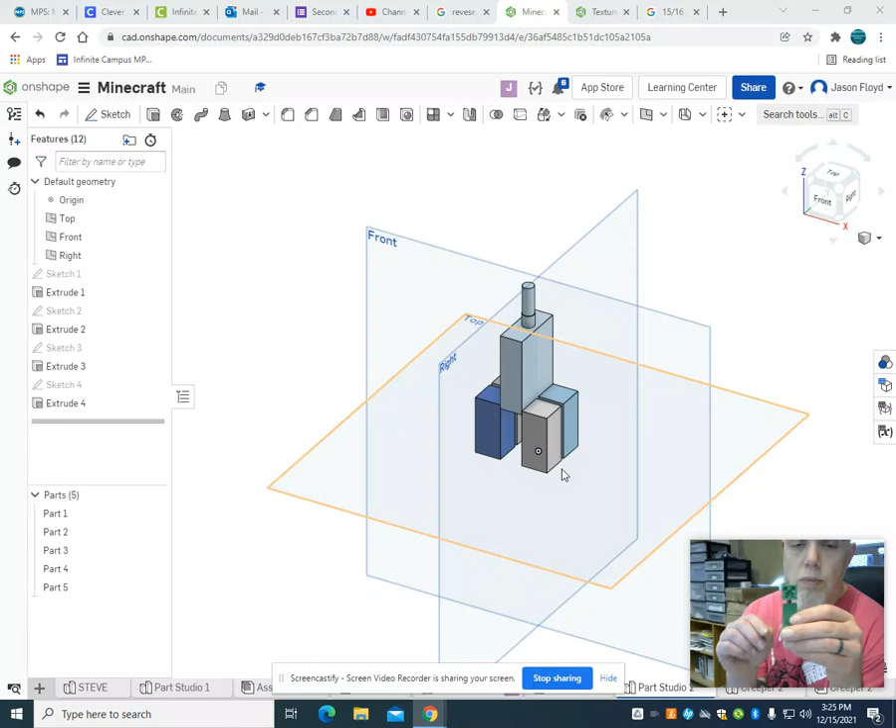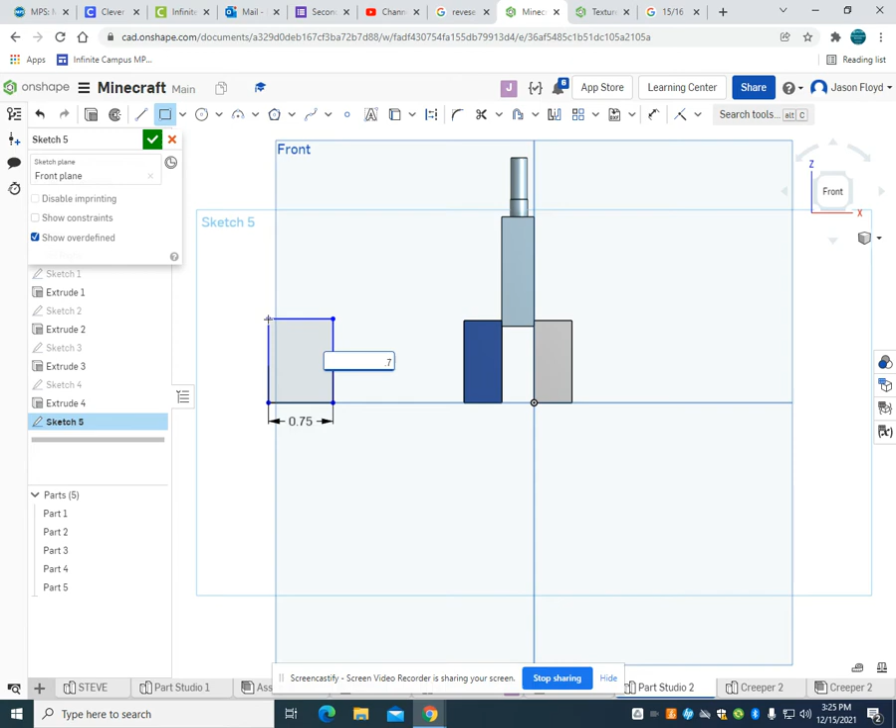So in our previous video, we had just finished our body for our creeper character here with the affixed joint or attached joint, and now we're going to work on creating that head for it. So I'm going to create a sketch, place it on my front. I'm going to grab that rectangle tool. I'm going to make a 0.75 inch rectangle by 0.75 inches, and I'm going to extrude it 0.75 inches.

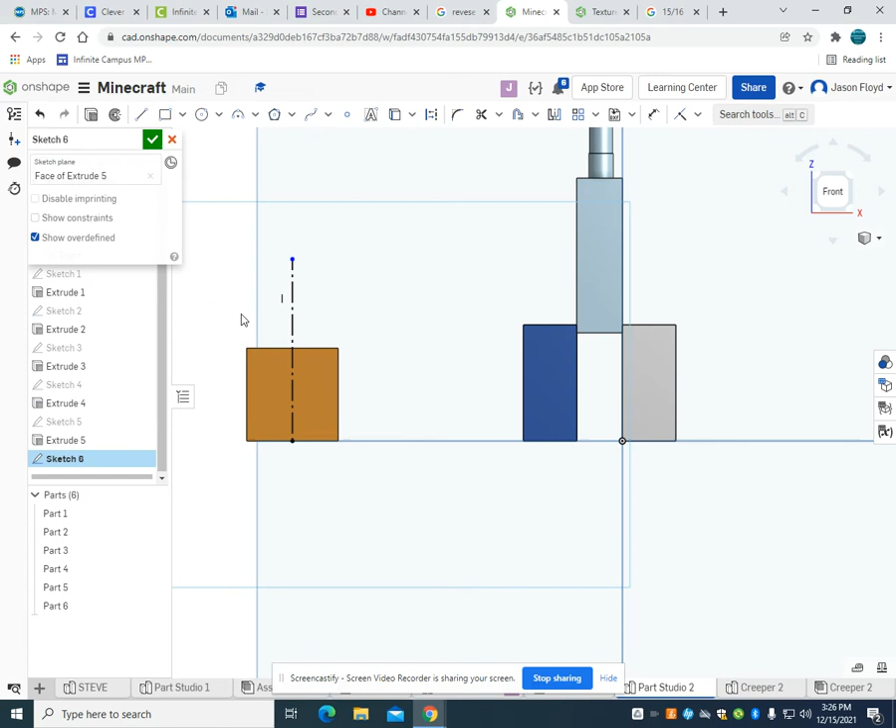I'm going to use that mirror tool again, or that mirror function here, which is going to work out really good for me. So I'm going to place that sketch here. I'm going to grab my line tool, grab my construction line, and I'm basically just going to divide this in half. So I'm going to go back to my line tool, and actually I can start off with my rectangle tool, and I'm going to make that first rectangle for the eye. I'm going to make that a 0.25 by 0.25. 0.225 by 0.225.

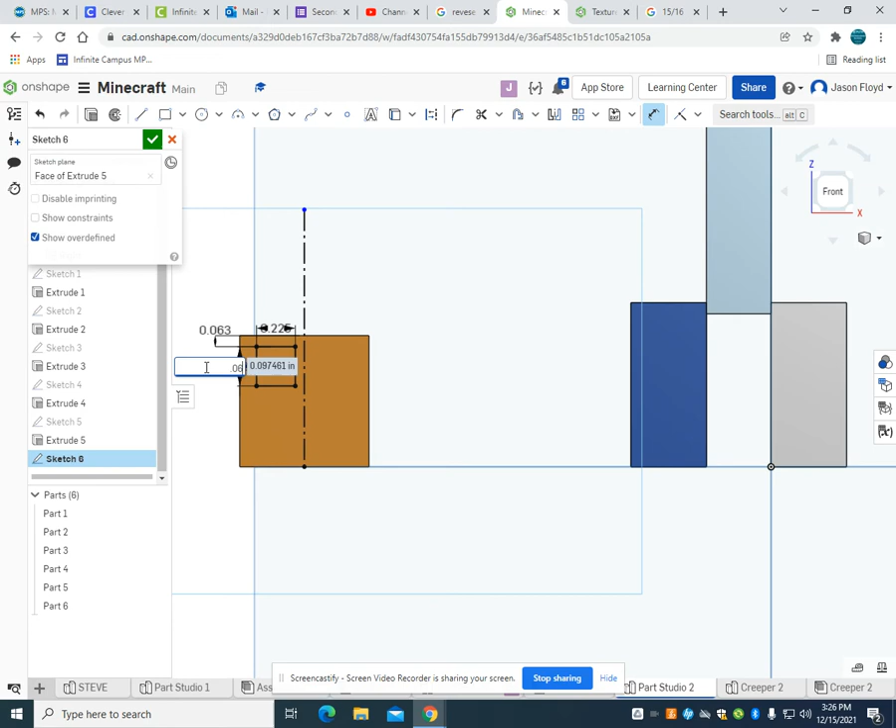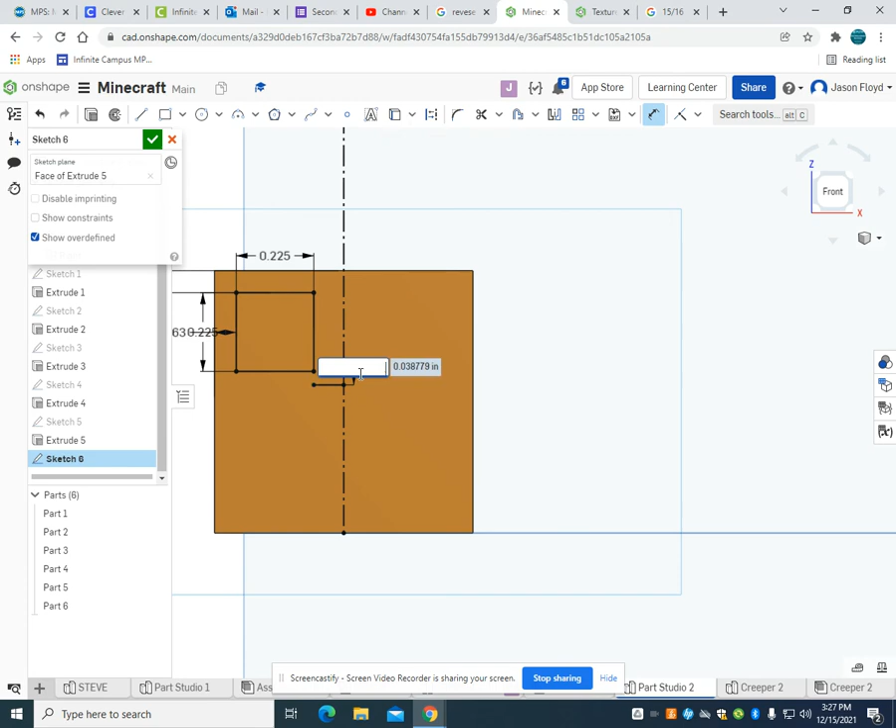And I'm going to grab my dimension tool and go 0.063 to the top and 0.063 to the side. So the next thing I'm going to do is grab my line tool, and I'm going to start my line even with this here. And what I'm going to do is just start going to the right, and I can make that first initial line to my mirror line, and then I can come back and I'm going to dimension this line from here to here, 0.005. So nearly touching, but just far enough off. It'll really work out well 3D printing in that manner. It gives a little bit of a space for the drawing, so it'll work out really well.

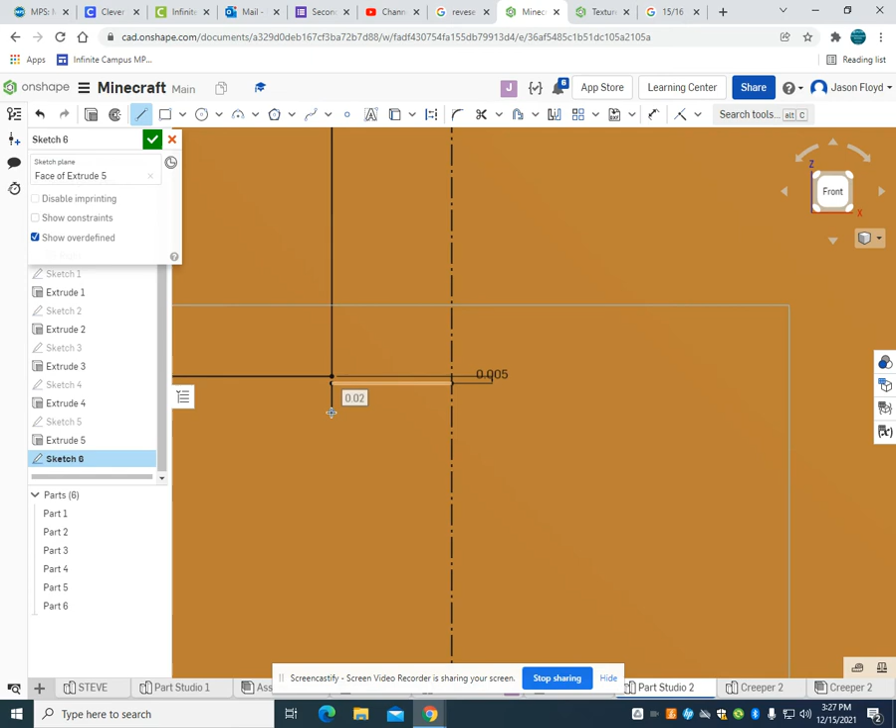So what I'm going to do next is I'm going to come to my line tool, and I'm going to come down 0.06 inches. So I have that line there. And from there, I'm going to grab my line tool again. I'm going to go to the left, 0.125. Zoom out and zoom back in so we can get a little perspective. I'm going to come down 0.3. I'm going to go down 0.125. I'm going to go up 0.063. And again, I can just come back here and connect to my center line.

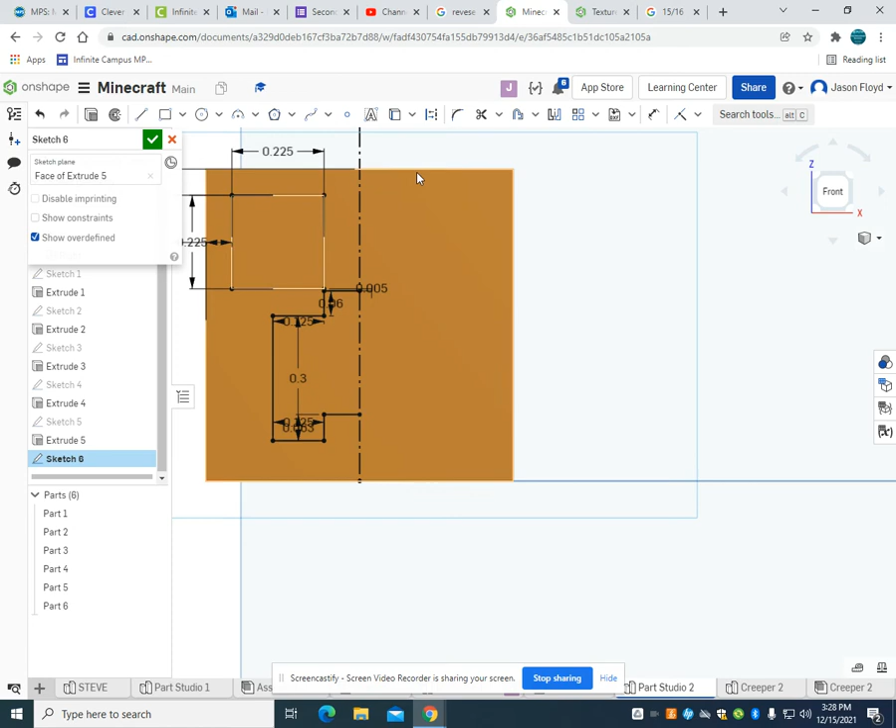So I'm going to come to my mirror function, click my center line, highlight everything I'd like to mirror. And there we go. I can click extrude. I'm going to extrude this. We can do about a 1/16 of an inch. And you can type that in and it'll convert. And I'm going to do this as a removal. So what we can see there is our head is resembling what we need now.

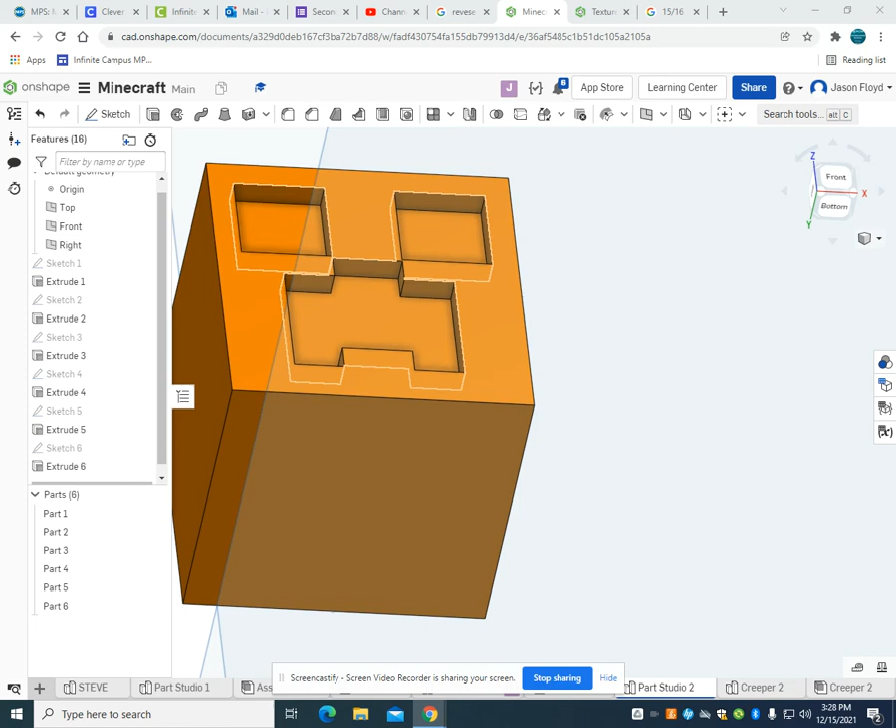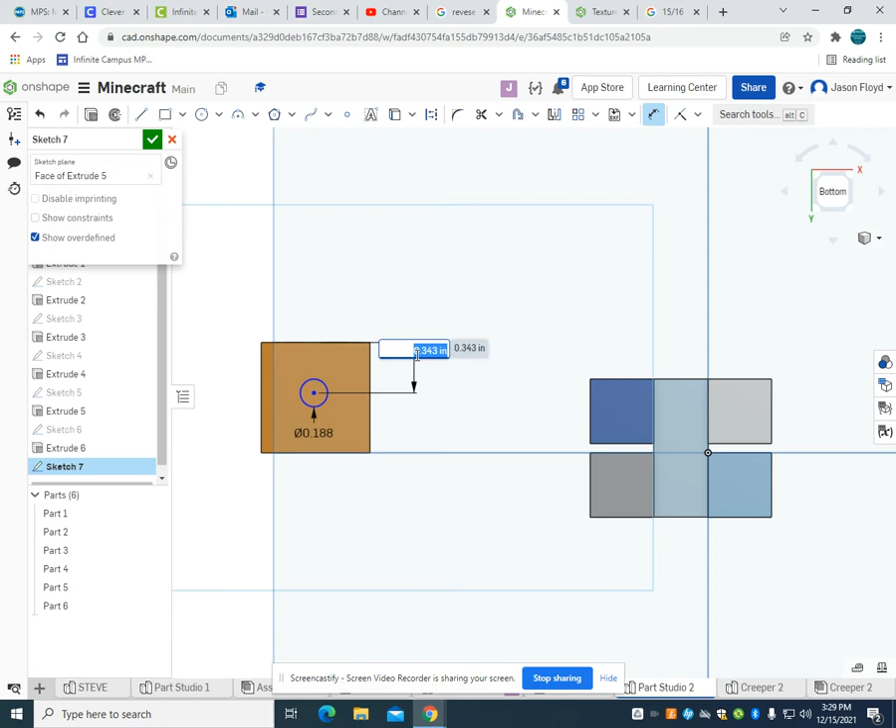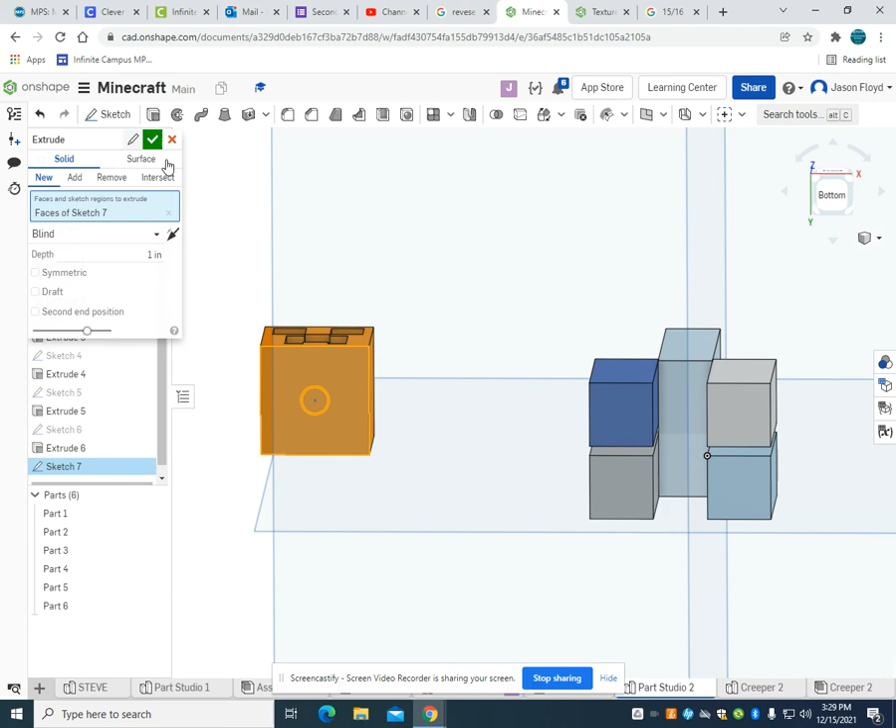But what we need to do next is we need to create that joint hole on the bottom. So I'm going to come here and place a sketch on my bottom, and I'm going to make it as 0.188 like we did in the past with the opening, and I'm going to dimension that so it's in the center. So that's going to be 0.375. You can take that off, and we're going to go 0.375. And we're going to extrude that as a removal, that 0.475.

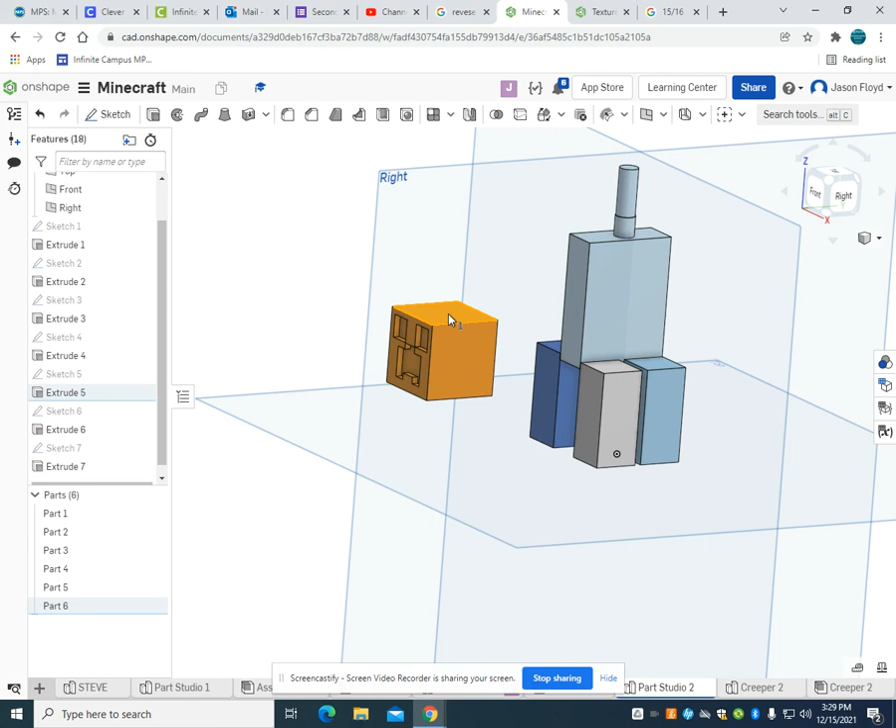Now again, if I'm 3D printing this, I'm printing this in two parts. The way I'm going to print this is this part just like as it is here. I'm going to print this part so it's laying flat against the base here with the hole up. Now, to show how to assemble this, I'm going to create a new assembly. And I'm going to insert these.

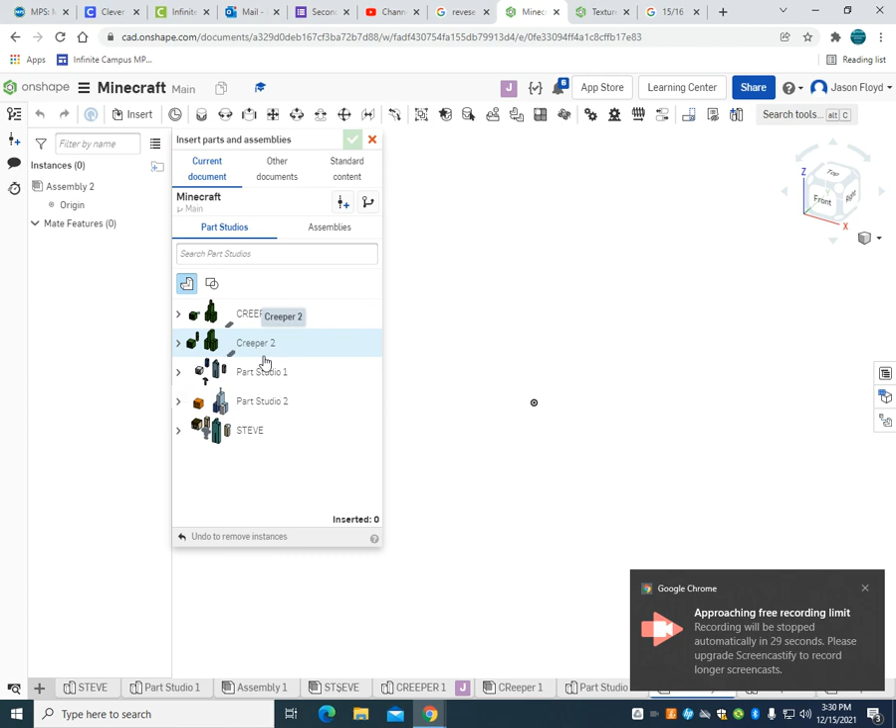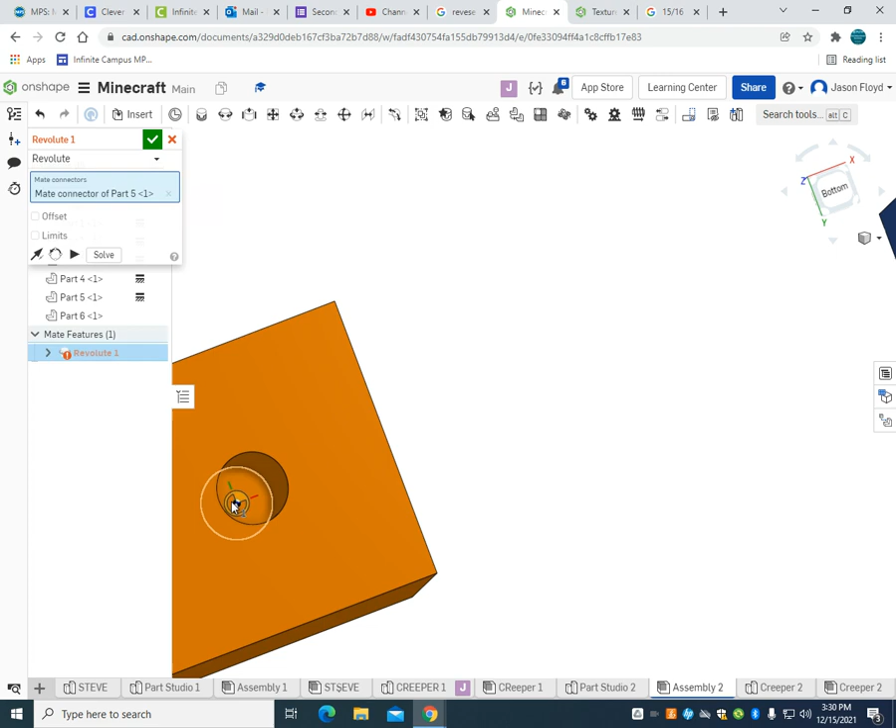And it's going to be quite simple. I can highlight all of these parts because I'm printing them as a piece and fixing them. And then I'm just going to use a revolute mate from the center middle here to the back of this. So that's my revolute mate. And what you're going to see then